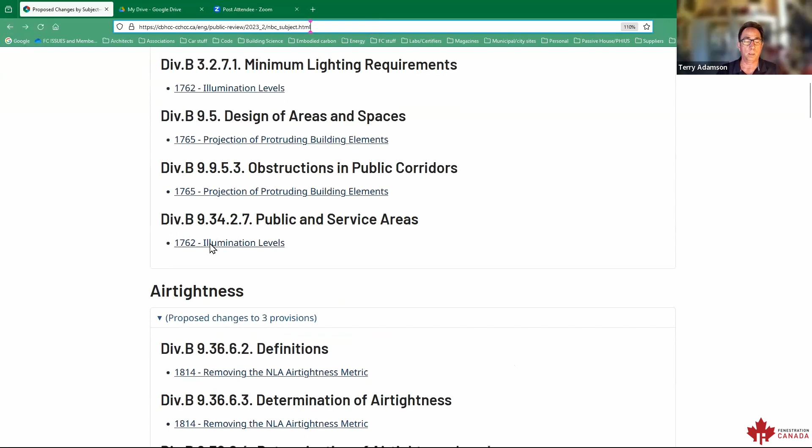It could be pretty impactful, obviously, by Anton's comments, and being required to bring a building up to energy performance of Part 10 could be pretty challenging. Okay, no hands up. I'm going to go back. And I've got NECB 2020 open right now, and it ends at Part 10. And there's no Part 11. So yeah. Again, what are those requirements that are in there, right?

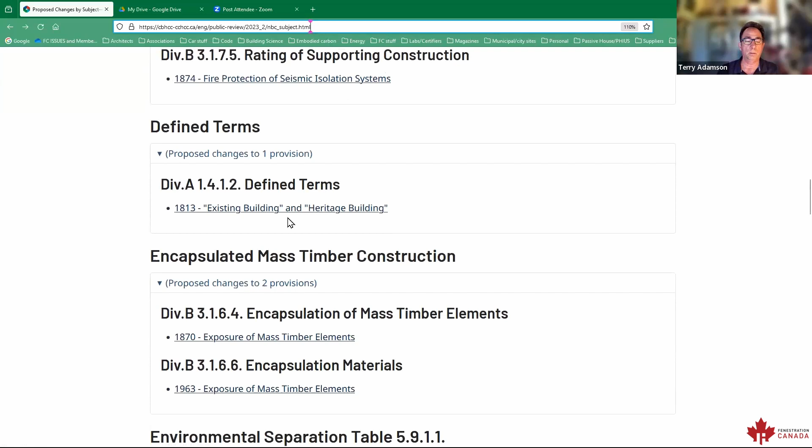Right. Yeah. Okay. I gotta find where I was here. Alterations. Okay. Building envelope. Building installation option. Okay. Combustible scope. Storage tank. Defined terms. That's where we talked about that. Encapsulated mass timber. I looked into that. There was nothing in there that I could see that was relevant to fenestration. Not sure what this is. Not relevant. Okay. Okay, fenestration. Thermal characteristics of fenestration, PCF 1823.

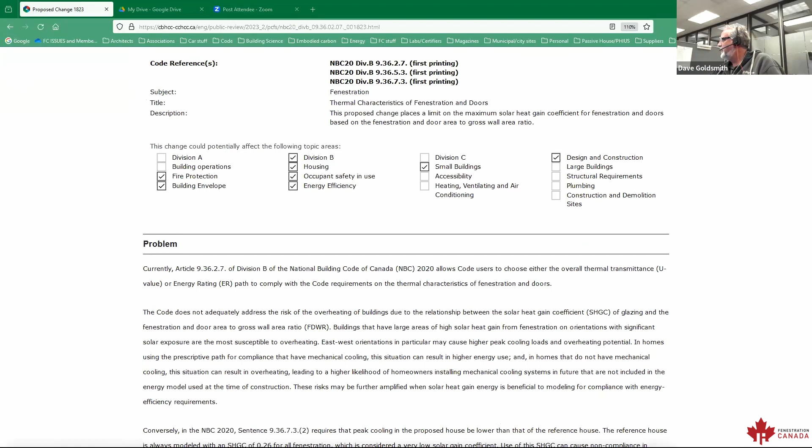Okay, Dave, are you okay to run with this one? I want to. Sure, just let me find it in my PDF. Yeah, I got a hunch there's going to be some comments on this one. Yeah. So if you scroll down, you will find that the required thermal characteristics are not changing in 2025. So this table looks very similar, very familiar. Yep. And in fact, these requirements have not changed since they first came into effect in the 2010 NBC. So they're not making any changes to these requirements when you go the prescriptive route.

However, if you scroll down, there is now a new table, and they're saying, yeah, you can only meet this prescriptive route provided you've got a maximum solar heat gain coefficient of 0.45 for fenestration and door-to-wall ratios of less than 17%, 0.40 for greater than 17% and less than 22%, and 0.26 for greater than 22%. And so what that's going to mean, so 0.26 is quite low.

Yes. So to get a center of glass value of 0.26 in a window basically requires triple glazing with two low E coatings, and one of the low E coatings needs to be triple silver, and the other low E coating needs to be dual silver. To get that in the overall unit U value under the NFRC system can require even more. In fact, it may be difficult, very difficult to get there.

Let's say in a casement, because of the way NFRC treats products, right? Your sliding door's 2000 by 2000, it's got a lot more center of glass area. Your direct set window is 1200 by 1500, but then your casement is 600 by 1500, and casements have a lot thicker frames than direct sets. So if you go into your casements, you're going to find that you might need a glazing that you don't currently offer to get down to the 0.26 for the overall window value under NFRC.

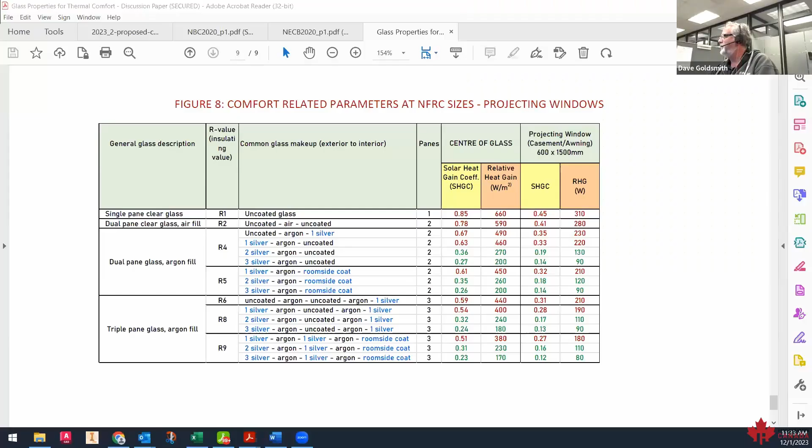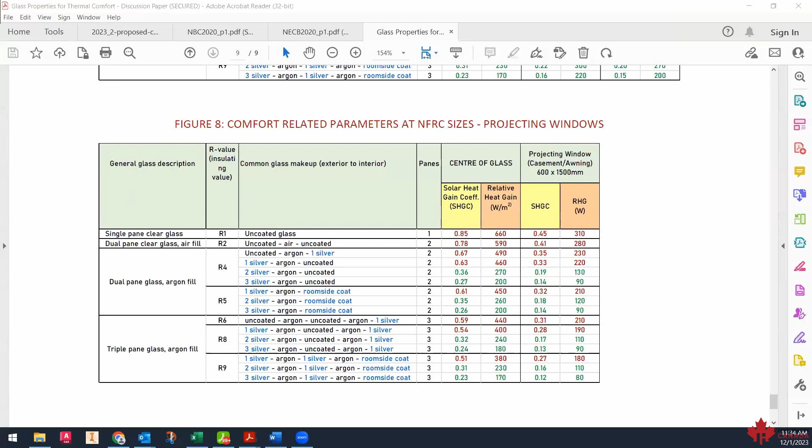Yep, I could share my screen here. Let me just open it. Okay, go ahead. And so here's Al's paper. Sorry, you can see it now, right? Not yet. Oh, sorry, you are screen sharing. Okay, let me stop sharing. I might have shared the wrong one. Share screen. Screen 2. Share. Okay, now can you see it, Terry? Not yet. Interesting. Hang on. Upper toolbar at the top. Hang on, I'm gonna stop. So now try it, because I was still sharing. Oh, okay, got it. Share screen. Screen 2. Share. It says I'm sharing and it's showing. You're there, yep. Okay, all right.

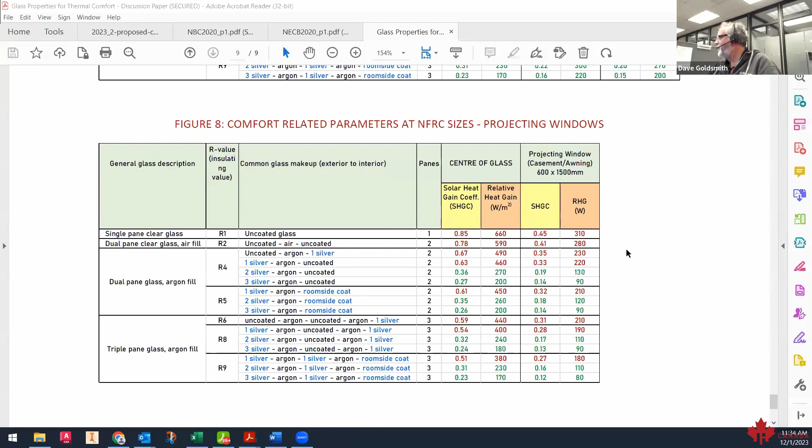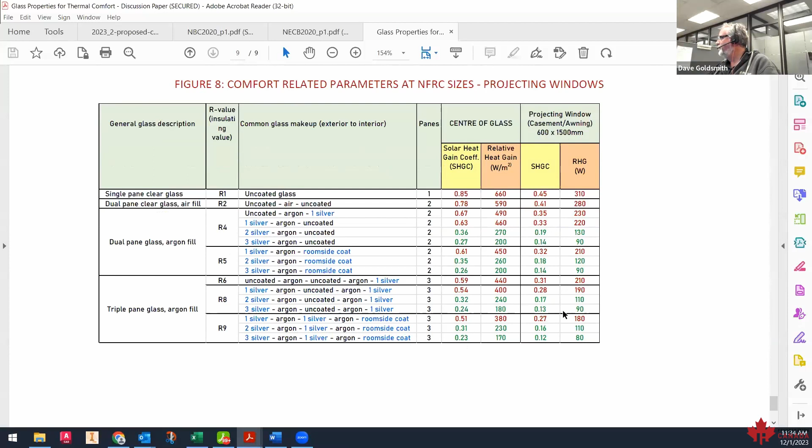So Cam, you mentioned, so this is Al, and I think he's taking typical here, right? And so he's saying, here's a dual pane, 1 silver, 2 silver, 3 silver, and your solar heat gain. So if you're at 1 silver, you're at 0.33. If you're at 2 silver, you're at 0.19, and then you go down from there, right? Yeah. But things look very different for a fixed window because of its size of 1200 by 1500, and typically the frame is less wide, so more visible glass area.

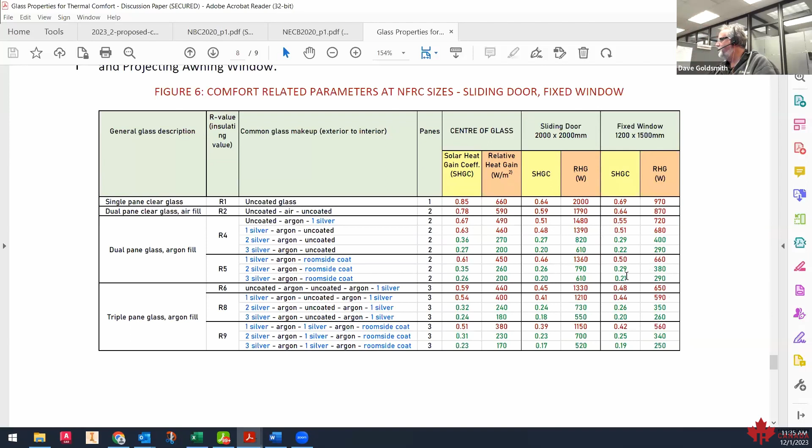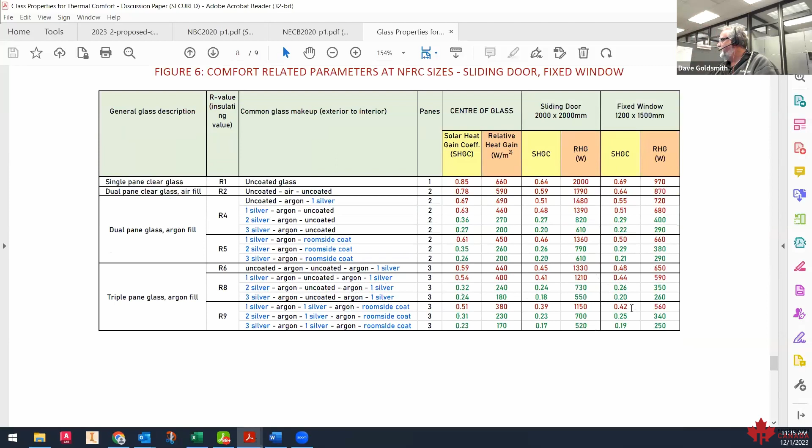Right. You've got to be 2 silver with a room side coat to get to 0.29, and then 0.21, or you've got to be in triple glazed, and you're not there until you go with double silver on the outside at 0.26, and then you've got to go with triple silver like a 366 and 180 on the inside to get 0.20. So it's more difficult for those types of products, as you can see. And it's going to get real complicated when you look at your entire product matrix.

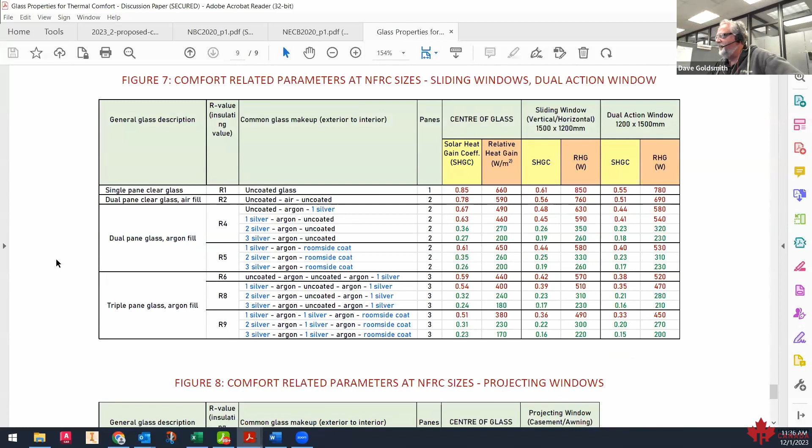The sliding window here appears to be less difficult. As we all know, sliding windows are modeled with that darn interlock, whereas direct set and fixed deck set and casement combinations aren't modeled with the T-bar, right? So then it's just creating a really complex situation for attempting to comply with that. You know, what do they want us to use? Different glazings, like have 3 silvers in the casement and 2 silvers in the direct set? This is just going to be very complicated and difficult to comply with.

And so we voted actually to publish this paper. Right now it's a discussion paper. I'm not sure where we're at on that, but it's being translated. Yeah, it's in the works, being translated. So this is very helpful for taking a look at this in context. And I'll just stop sharing. I think we've seen enough of that. Don't want to turn the whole thing into that paper. No, we're not there for that, for sure.

Where did my proposed go? Okay, so another comment here, Anton saying completed analysis with a sliding door system. Triple glazed options range from solar heat gains of 0.389 to 0.196. So pretty wide range there.

My comments when I was at the energy efficiency steering committee meetings were that one number applied across the country does not make sense. Whether it's under 17 and 22 or over 22, a single number doesn't make sense. The numbers are driven by the building design, orientation, location, etc. It's central planning at its best, Terry. One size fits all, right? Yeah, and it doesn't work.

And then people in Quebec hate it. They want as much solar heat gain as possible for some reason. You're having a fiery conversation with Robert. Sure, and you know what? A 0.45 or a 0.50 or a 0.55 is probably perfectly fine in the right building, in the right location, with the right amount of glazing.

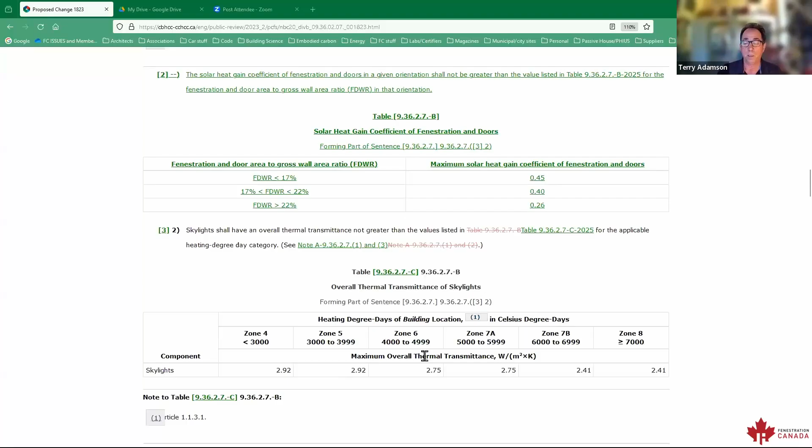Okay, obviously a big item, certainly has potential for some pretty significant impacts. If anybody has any other comments, by all means you can share now. Like we showed you earlier, you can go in and comment on this PCF directly. You're certainly welcome, and we encourage you to do that if you have an opinion either way.

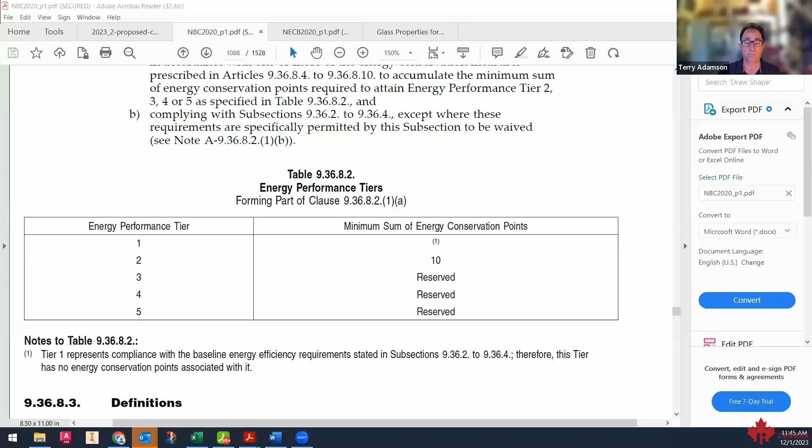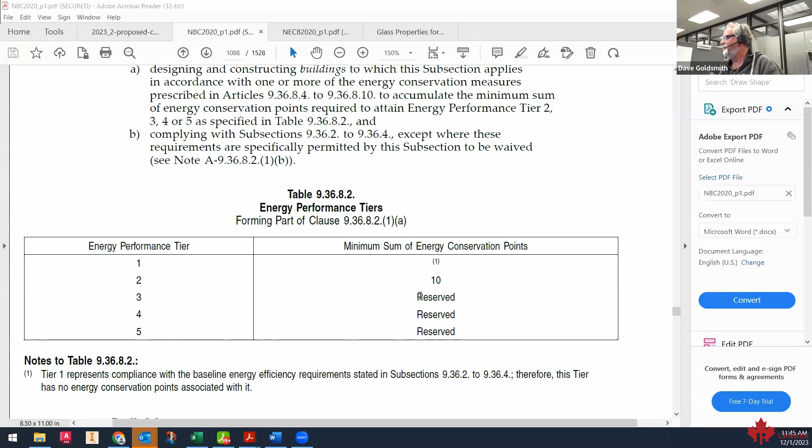And so a tiered energy performance compliance prescriptive path. So it's a performance path, but it's a prescriptive performance path. And it allows you to get only up to tier 2. So in other words, in future years, this won't exist. Once you get to 3, 4, and 5, it says reserved. That means we're not going to do anything above 2 using this path, right?

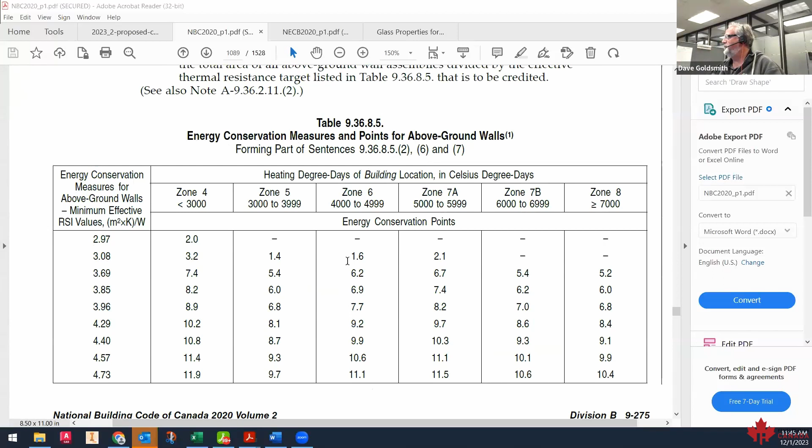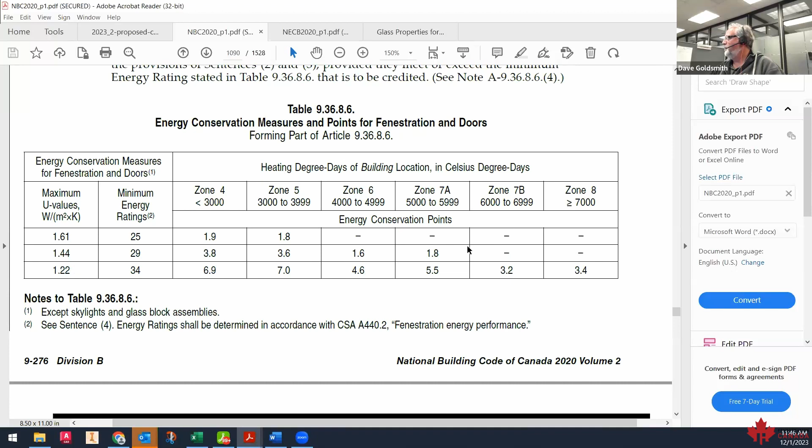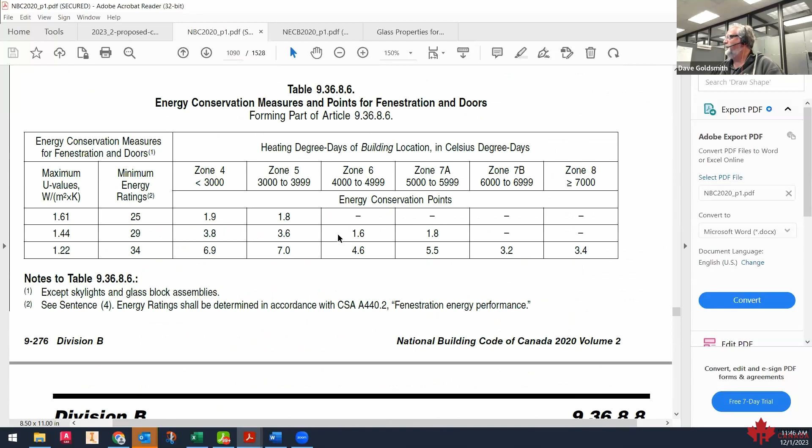But then it gives you basically energy conservation measures and points for above ground walls versus code minimum, and for fenestration and doors, and it currently says you require 10 points. And so at 1.22, that gets you in lower mainland 6.9 or 7 points. In colder places like Calgary, it gets you 4.6 or 5.5 points, and you have to make up the rest elsewhere. Which you can do now with air tightness and stuff like that as well.

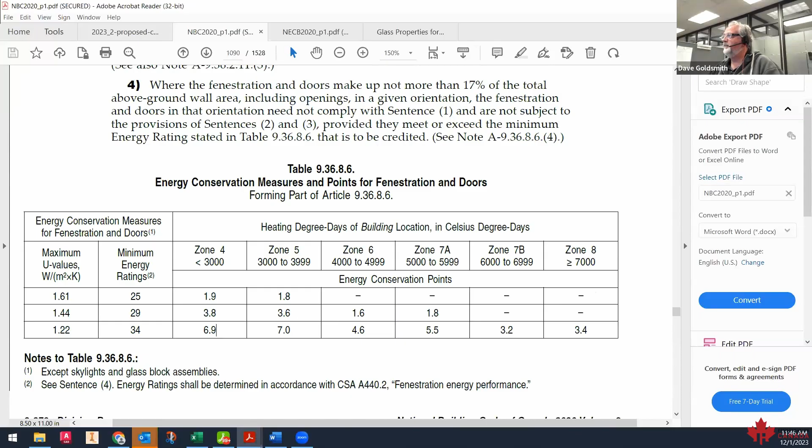So now they're allowing you to, and this is going to be effective 2025. We haven't even got 2020 in yet. Yeah, exactly. I know, don't get too excited about this. So yeah, that's it there. I mean, we kind of chuckle that we're looking at 2025 and we don't even have 2020 yet.

But this allows the industry to say, okay, now we know what these numbers look like, and if I can have a window system that hits those numbers, I'm going to be able to go to my client and say, I've got all your energy conservation points just in my windows. Yep. And you're good to go. And plus the comfort, right, Terry? Don't forget about the comfort, wearing a t-shirt in the wintertime instead of a sweater. Yes, absolutely.

Okay, Anton's got his hand raised. Anton. I'm just going to unmute. Can you hear me? Yep, we can hear you. So go ahead.

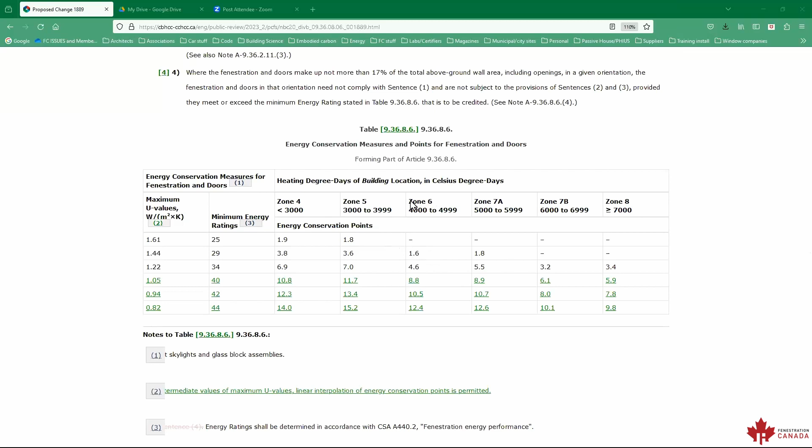Alexi has a hand up, but I don't know if it's because he wants to talk or volunteer. Hang on, we'll get you. Okay, you're allowed to unmute now, Alexi. I'll join the group. He wants to join the group. Okay, thanks, you're in. Sorry, I'm just trying to click on the right people here. Alexei, I don't know if I've got your company or email. Can you put it in the chat, just to the presenter? Yeah, I'll be able to chase it down. Okay, great.

Got 7 minutes left, Terry. What else do you want to jump on here? I'm just trying to clean up some comments. Ross is asking about comments that you would like us to consider during this public review.

If you can have those comments to me by Friday next week, that'll still give me about 10 days or so to make sure I can work through them and get them built. Thanks, Alexa. I'll get them in. So any comments on what we've discussed today or anything else in this public review that you want to comment to, and you would like us to potentially comment along the same vein, if it makes sense for us, certainly send those comments to me by next Friday, and I'll work my way through them and get them into this comment period. Okay, so that's done.

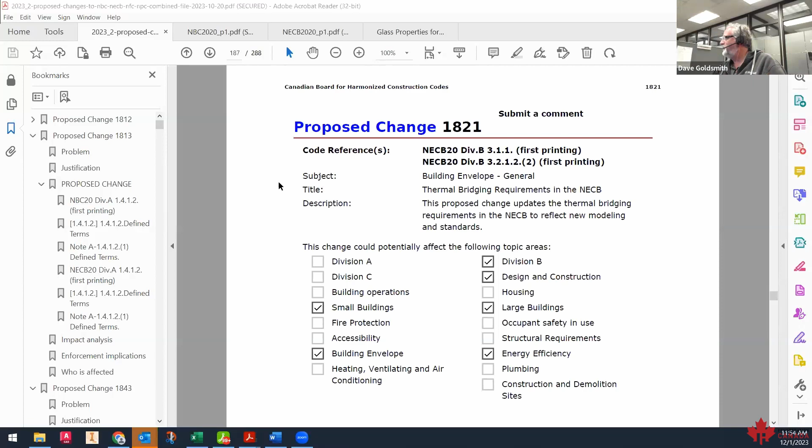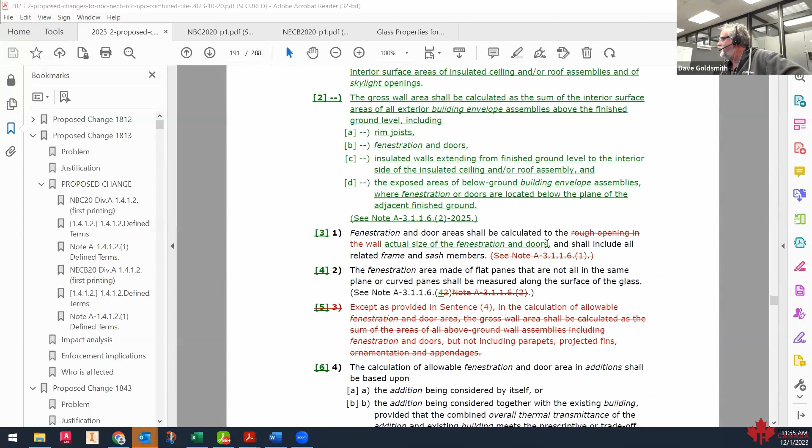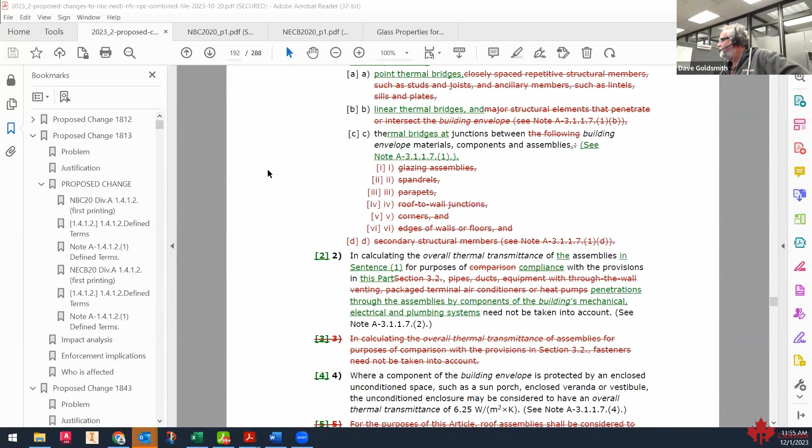Yep. So it relates to thermal bridging requirements, but it does touch on fenestration in its comments further down. Well, first of all, what has changed here is fenestration and door areas shall be calculated to the actual size of the fenestration and doors. They've struck out rough opening in the wall, so that is a change in this section. But they have some really interesting text here that may contradict.

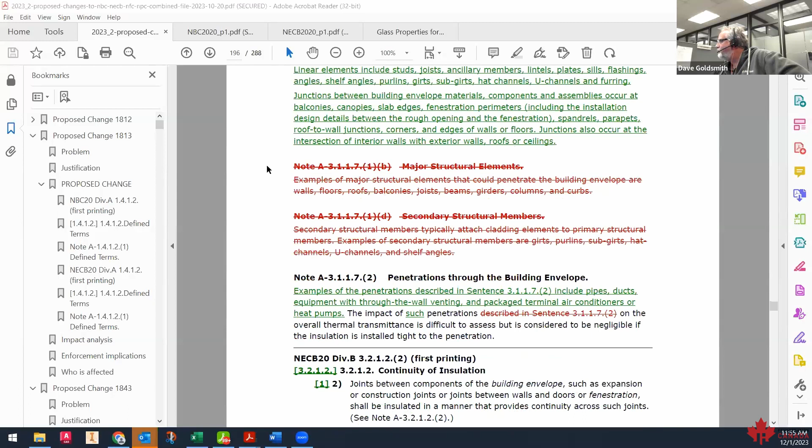Okay, so continuity of insulation where components meet. So they're talking about the intersection of two components, such as a wall with another wall, a roof, or a wall with a window. So they're saying there should be no gap in the insulation between the two components. For example, to reduce thermal bridging, the space between the window frame and the rough opening in the wall may be treated with low expansion sealant foam product complying with that standard.

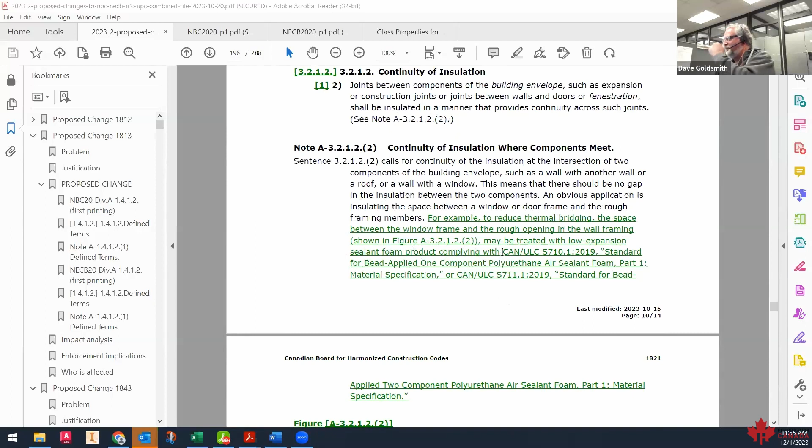So this is going to fly in the face. This is just a note, though. That's a note to the part, right? So it's not normative or mandatory, but this is going to fly up against sloped and flashed subsill drainage and draining cavities. Yeah, absolutely. So that jumped out at me. We're going to want to have comments on that too.

So yeah, I did sit in a group that was discussing this, and there was a lot of discussion about maintaining drainage of that cavity and how much of that cavity needs to remain open. Talk about hydrophobic insulators, rod and caulk back seals, back dams, using a sill pan that would allow you to keep that cavity open. So yeah, there's some conflicting direction here that needs to be addressed.

So Brad, sorry, you had a comment? No, you just answered it. Volunteers can now put down their hands. Put up your hand if you want to speak. Yeah. Alexei, you've still got your hand up. Is that from before? There it goes down. Okay, thank you. Thanks. Okay.